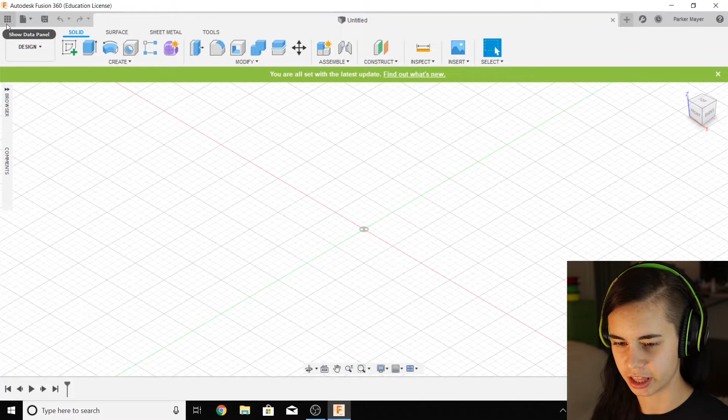Okay, let's kick things off. Open up Fusion 360. First things first, let's make sure the data panel is open and that we are within the special VEX IQ project. What you're gonna open up is number 2, Dipsy. Remember, use the scroller wheel to zoom, shift and drag the scroller wheel to rotate, and just drag the scroller wheel to pan. You can also do those controls down here, and you can also use the cube in the corner.

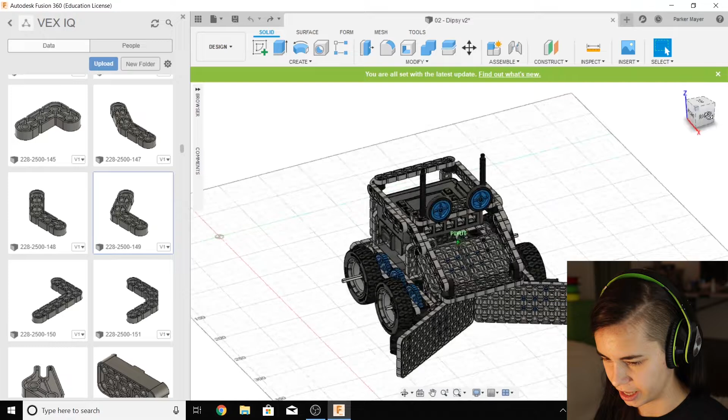First things first, let's create a version of this for ourselves. We're gonna hit save as, and you can replace the number with your name. Okay, my name's Paker. Okay, boom. So here is my Dipsy.

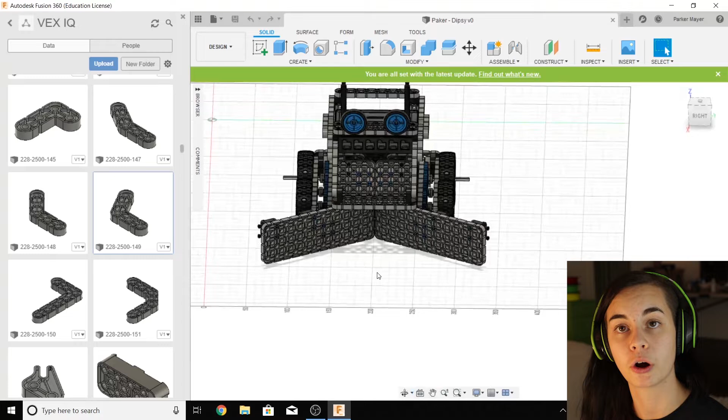Obviously the epic spikes are missing, and we gotta add the touch LED mod in the back. We will get to that and we'll make this thing complete before the night is over. But before we do that, we want to make sure that we're capturing design history so that we have a nice little record of everything we've done so we can go back and change something if we want.

We're going to open up a browser window here. You can collapse this list of parts. Go into the robot if you want. You're gonna right click and hit capture design history. So we got our timeline popping up down here. Sweet. All right, so what we're gonna need to do, I'm gonna add the spikes first, so I'm gonna drag in 4 45-degree angle pieces and get them all ready to go.

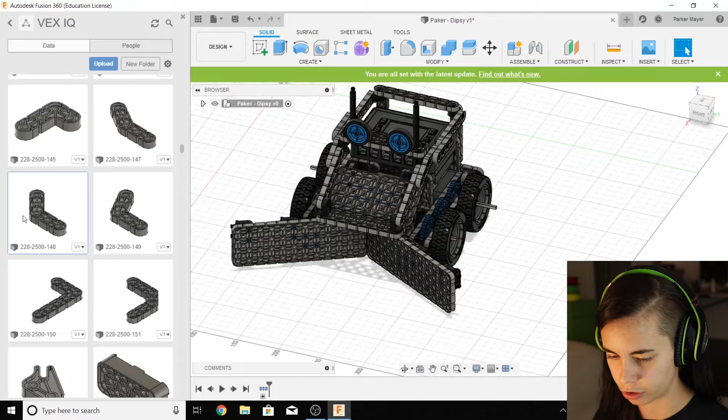Okay, we got one here. Okay, number 2. And 2 for this side. I'm using this square to move it because then it'll only move it horizontally, vertically along the XY axis and not up.

Now, since we're creating rigid joints, like we did in Tinky Winky, we're essentially welding the angle piece to the corner connector here. We only need to explicitly connect one little connector pin on the corner connector to one hole on the angle piece, and it'll be fused there for life.

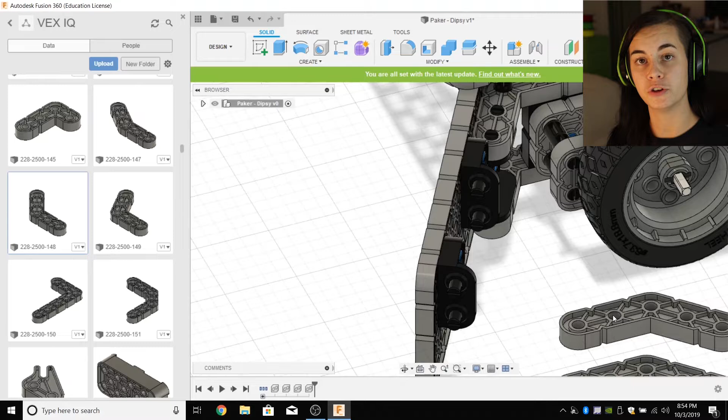So let's hit J to create those joints, and I'm gonna do the upper hole. I'm gonna say I want this whole edge right here to move to and mesh with the base of this connector pin. So we're gonna wait till we see that little circle with the cross right there. So that, boom. I'm gonna hit that, and the last step is let's kind of get my perspective set here.

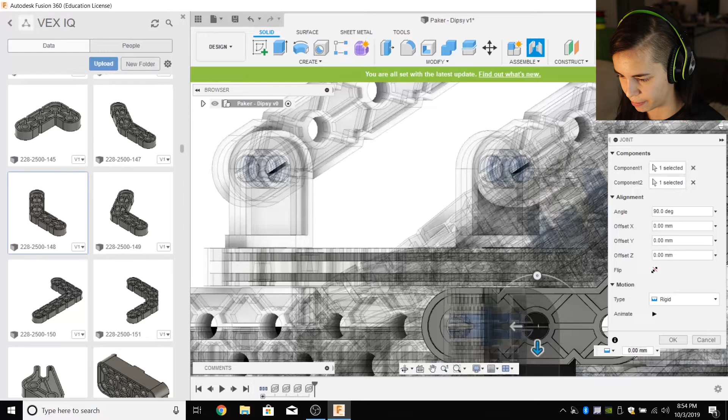I'm gonna hit this at the corner so kind of get me, and then I'm gonna rotate it myself so I can kind of see it straight on. I want to rotate it 90 degrees, or technically to the 0 degree position, so that it's facing the right way and it is fully spiked out. Now let's see if we got that.

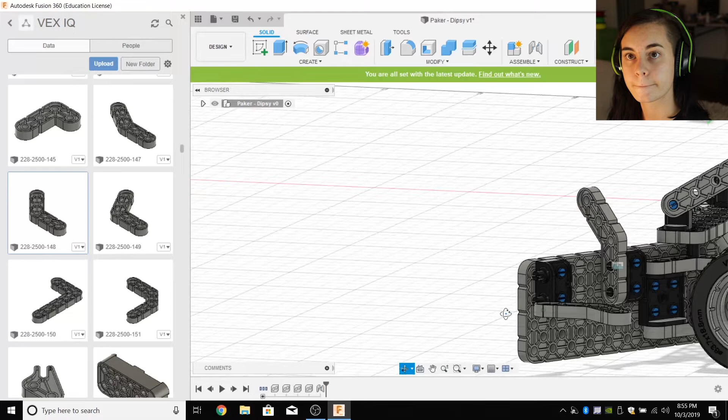Yeah. Okay. So the next one, let's rotate around here. I'm gonna join this whole edge with the base of this connector pin. Boom! And we want to rotate to the 0 degree position. Straight up and down. Woo! Look at that! Okay, Dipsy's coming along nicely.

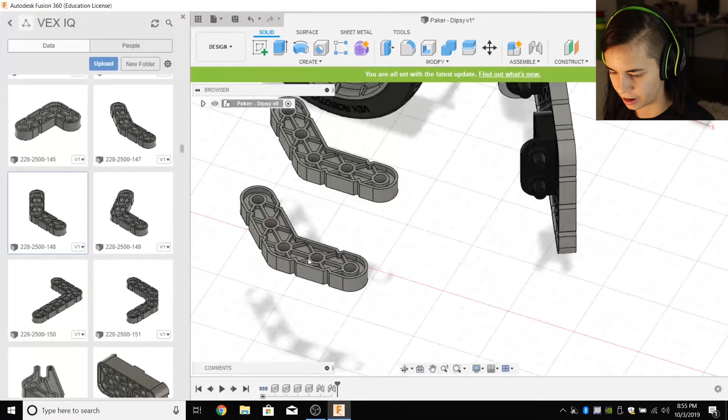So now with these pieces, if I were to join this, just join this hole with this, it'd be facing the wrong way, so I'm going to flip myself under, hit J to join, click here, pop myself back up, and pick the base of the connector pin.

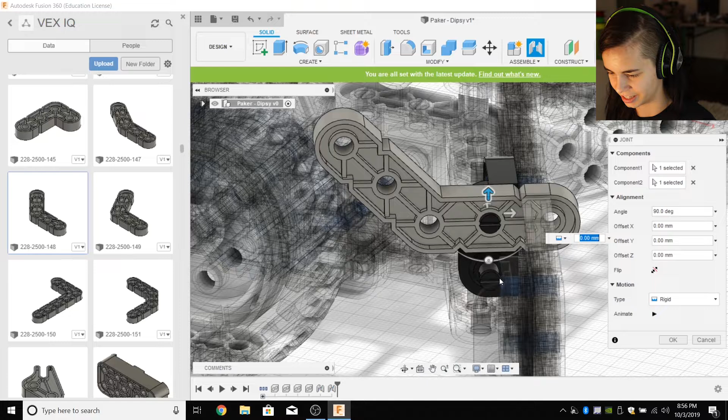Boom. Oh, see, I accidentally moved it down. I did not mean to do that. Move it back to 0 millimeters. I'm going to rotate it to 180 degree position. All right, sweet. We'll do the same thing.

This one! The best is when you throw on a YouTube video or podcast in the background and you just work on your robot. It is the ultimate weekend activity. Okay, so we're going to rotate this around.

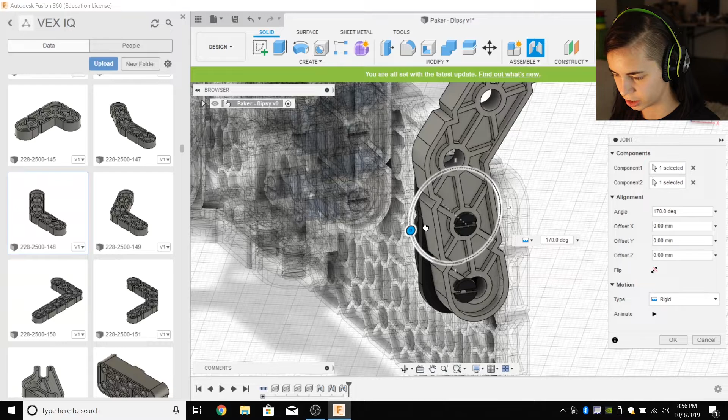Booyah! Okay, check it out. So we got the spikes. We are halfway there. We just want to get the touch LED mod going in the background.

So there are 6 parts we're going to need for that, and we're going to need the touch LED itself. So let's scroll until we see that. It should be somewhere around here.

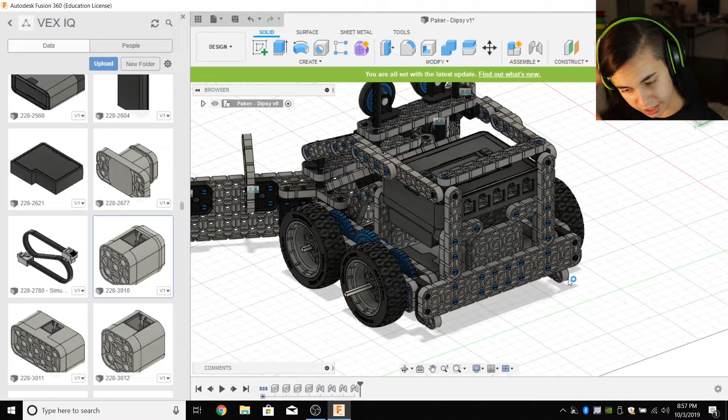Ah, yes, the classic 30-10 piece. So we'll drag one of those in here. Okay, now we want a 5-hole corner connector piece. Okay, here we go, part 134. Drag this over here. Okay, and then the last thing we need is 4 of those pesky little connector pins.

Notice how the timeline looks—we got so much stuff on our timeline, because we are adding in lots of components.

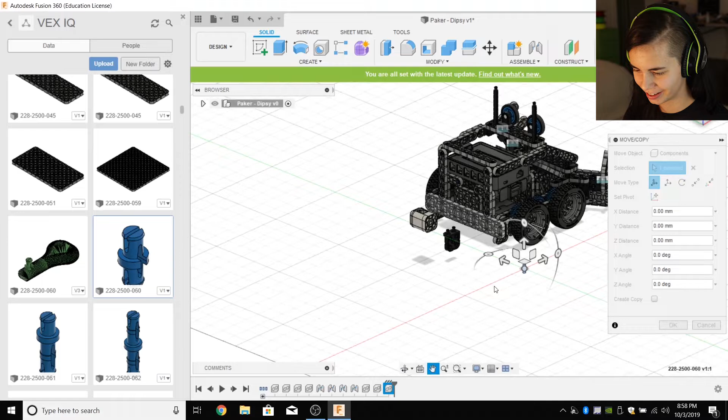All right, awesome, so we got all the parts we need for the Touch LED mod. I'm not gonna worry about the cable for the Touch LED or the motors, but just know that's something you can do too if you want.

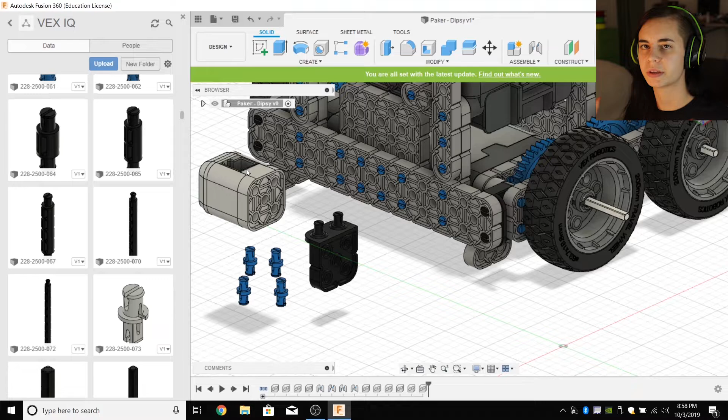Okay, so I want this connector, this corner connector, to go right here. So we're gonna kind of pan down here. We're gonna pick one of the connector pins. I'm gonna pick that right one right there. I'm gonna say, I want you to go right here to this.

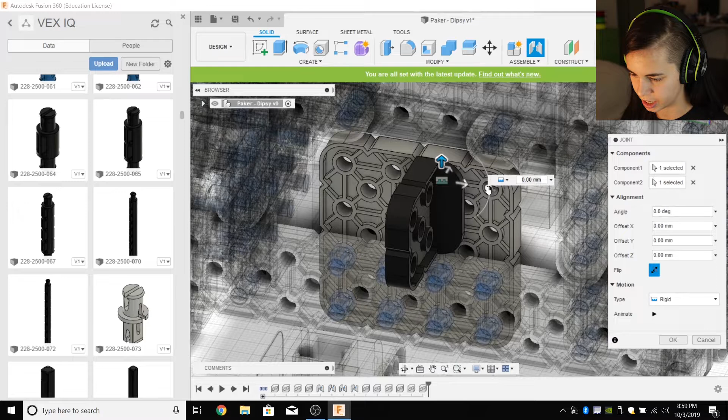Whoops. And so see how it's a little weird? We can hit flip to flip it around, and I'm gonna rotate it this way so that the flat side's facing up. Oops, 90 degrees.

Now we're gonna get these 4 connector pins. I'm gonna look for that circle with the—boom! Circle with the cross in the middle means that you're in the center, connecting center to center.

I'm gonna pop those into these 4 holes. And see, now we have to hit flip again to get that ridge up. So just keep an eye on the flipping.

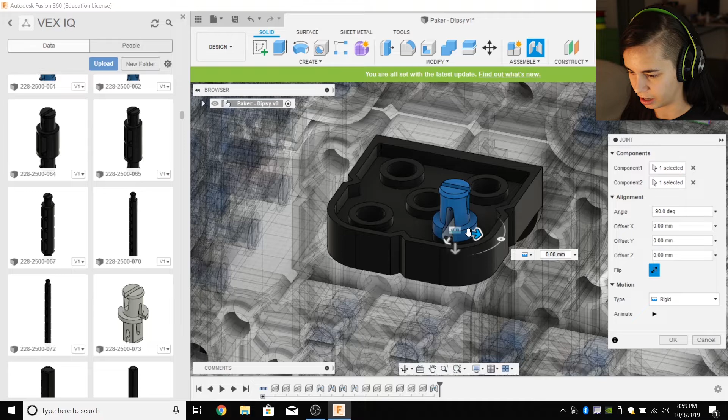I'm gonna do the same thing over and over and over again, and we're gonna have to flip you too.

Okay, let's say you click the wrong part of the connector pin and the joint looks super weird and off. You can just X on component 1 and then re-pick the part of the connector pin that you want. Okay, we're gonna hit OK.

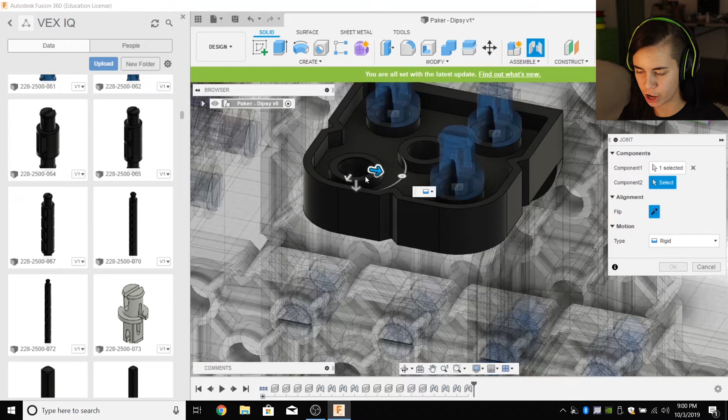And last one, boom! We're gonna probably have to flip it. Yep, okay, so flip on that.

Okay, so on this one, you might notice, oh no, the parts are coming apart. So we're gonna—see, we want this to all stay together.

So what we're gonna do is I'm gonna scroll down to the bottom until you see it. Oh, boom, okay, there it is. Double click, it's highlighted—we know that this is this part in our parts list.

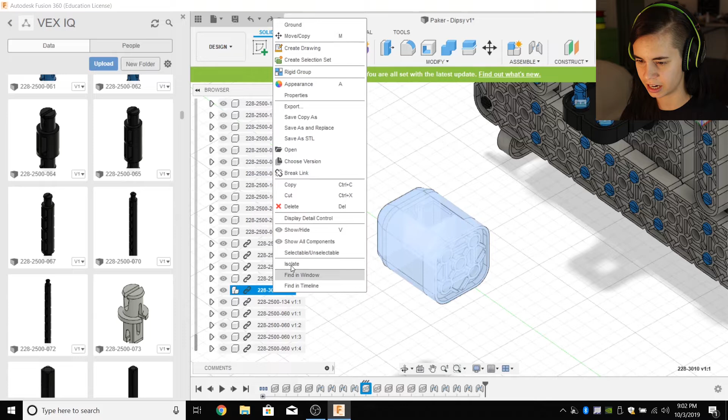So I'm gonna right click it and hit rigid group, and that's going to create a group out of the 6 selected little pieces of this. And boom, now it's all together. We don't have to worry about it.

Almost there. I'm gonna hit J, hit capture position, and pick this hole, and I'm gonna mesh it with the base of this connector pin right there.

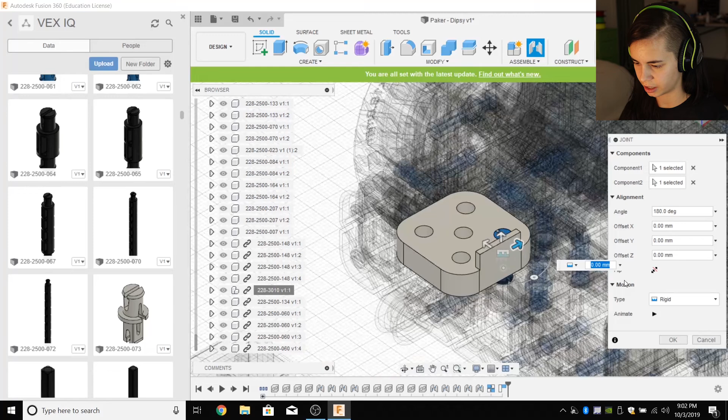And we are going to rotate. Don't worry that the whole thing didn't come with it—it's gonna come with it in a second.

I'm gonna do a full 180 rotation, all the way to position 180 degrees. Let's try that, let's see if it works. Okay, looks pretty good. Is that? Yes! All right, we got it.

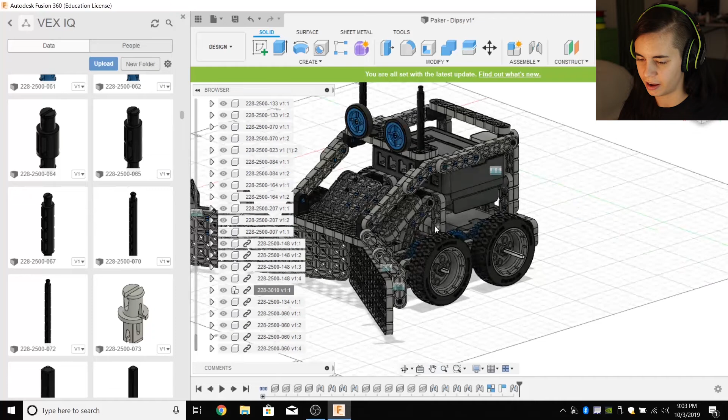So feel free to mess around with this until you get it the way you like it. This currently matches our very official Dipsy build in real life.

So what you can do, Control S to save it. You can leave a little note, spicy note. I'm just gonna leave it user saved.

Wait for it to save, and you, Robot Trainer, are done with the CAD model for Dipsy, so you can go crank out the code for that thing.